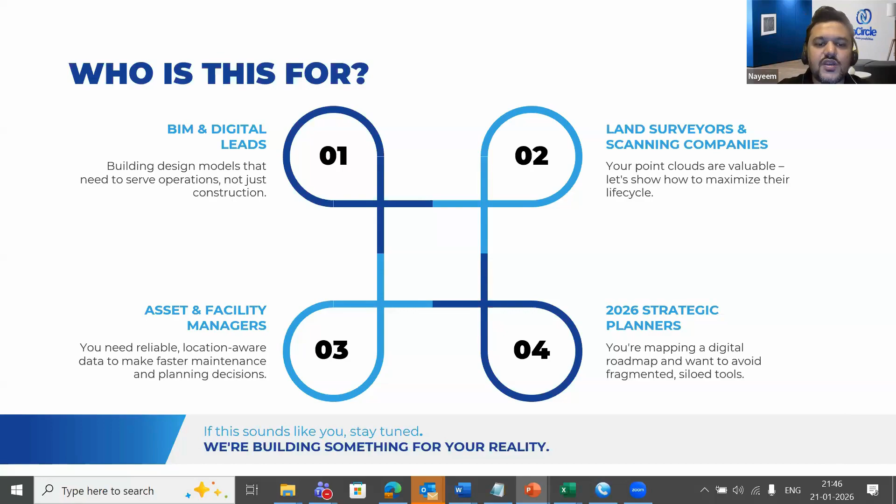And finally, if you are someone who's an asset owner, from the asset management side, you're not chasing polygons or file formats. You simply want fast, reliable answers - for instance, where is my equipment, what condition is it in, or what changed since last month. So if any of that sounds like your day-to-day world, this session is absolutely designed exactly for you.

So let's talk about 2026, because the pressure has never been higher. Clients and asset owners no longer want to hand over a box filled with different formats, like PDFs, DWGs, or even models.

What they want now is live, streaming, operational data - real-time dashboards, carbon and energy tracking, predictive maintenance insights, and very clear visibility of what's happening in the field right now.

But here is the challenge - the tools and processes we rely on today were designed for design and construction, not for day-to-day operations. So we end up with a massive expectation gap where owners are asking for actionable intelligence, and we are still delivering static documents and disconnected 3D files.

This is the pressure that is shaping every digital transformation conversation in 2026. The industry knows where it needs to go, but our workflows, formats, and platforms haven't really fully caught up yet.

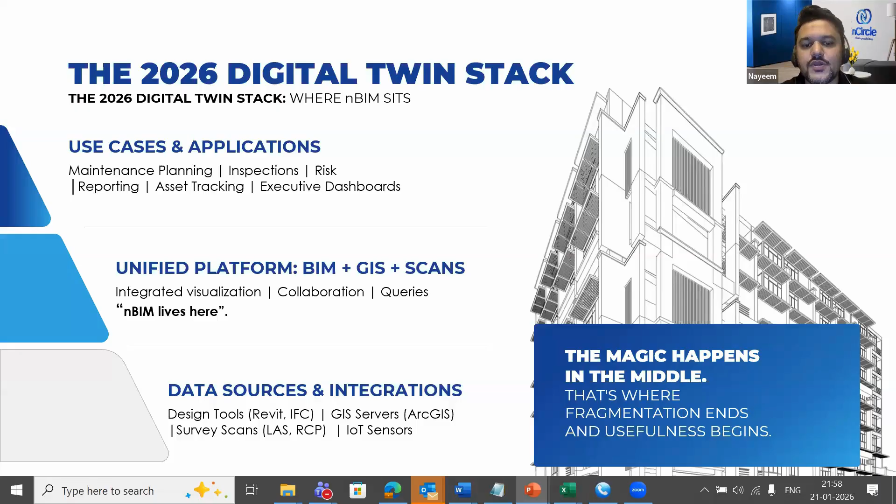So this is a stack that finally makes digital twin usable, accessible, and scalable across entire organizations.

Here's what we often come across, where every organization tries to solve this problem on their own. For example, most teams go down to two paths: either build it yourself, or buy a massive enterprise system.

Let's take an instance: you hire developers, they write custom scripts, stitch together APIs, and try to create your own digital twin platform, which is very expensive and slow. Two years later down the line, you are still wrestling with integrations, performance issues, and data alignment.

Similarly, when you buy a massive enterprise system, you're suddenly dealing with complex interfaces, rigid workflows, heavy desktop installations, and months of onboarding your team members. At the end of both paths, the result is the same.

You're still stuck somewhere in both options. The workflows don't scale up, the field teams don't adopt it, and the digital twin stays in the innovation lab instead of going mainstream.

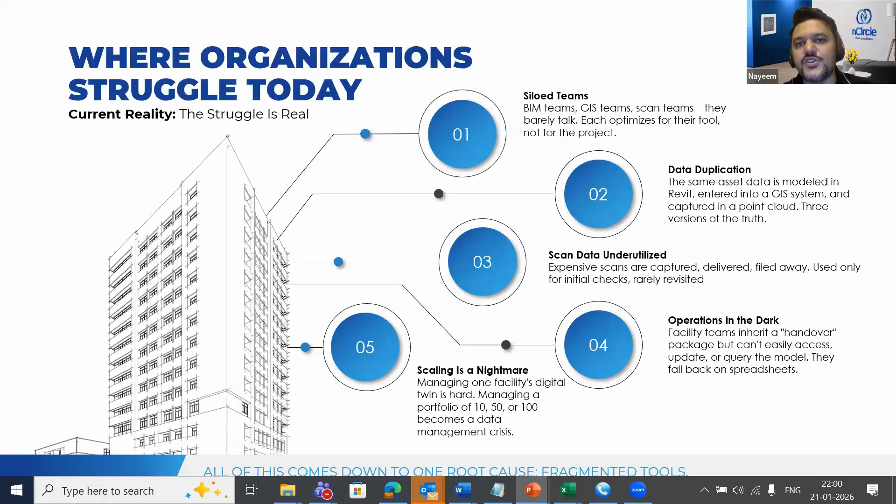But rather than keep talking about it, I would rather show you. Let's switch from slides to some real-time action, which is the demo. I would like my colleague Pratik to take over and give us a demonstration of nBIM. Thank you.

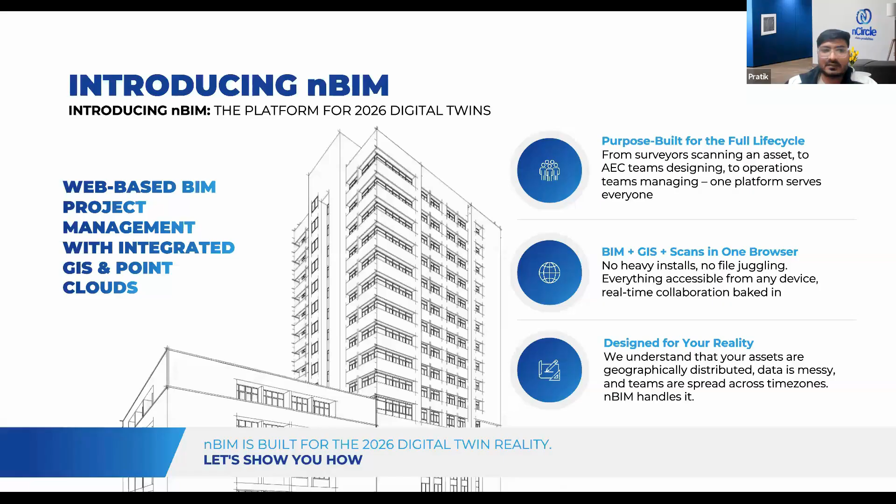So here now let me explain how this our platform solution works. So basically we have a solution that is nBIM. nBIM is basically a unified platform which is solving multiple problems.

By the mean of unified, it has multiple types of viewers. We can load BIM files, we can load GIS files. So it's basically combining the BIM model in GIS context, so we can add GIS layers. In industry, we have three types of things: BIM, which is design and details; GIS context, which is basically location and the actual; and the third part is the point cloud data, which is the actual how the model looks and how in the real world it looks like.

So what does nBIM do? nBIM will combine all these three pain points because the data is scattered, and we combine all the points in one platform, that is nBIM.

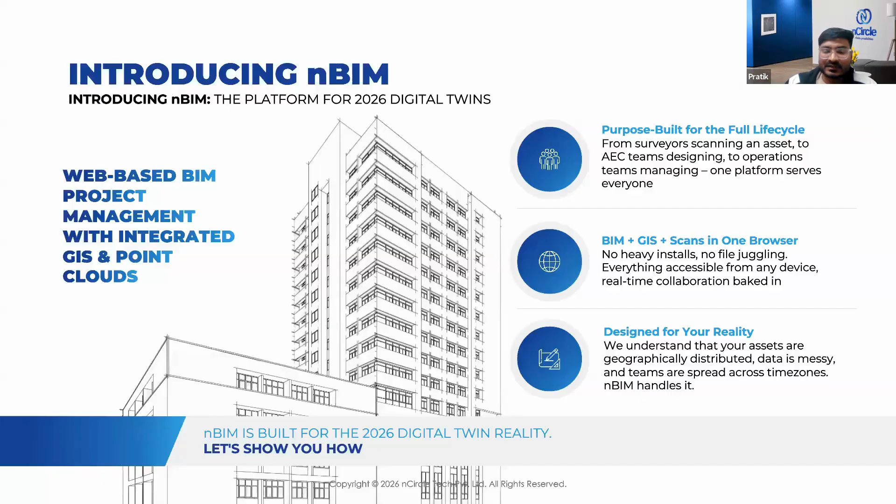Now let me move to the video part so I can explain it in a better way how this nBIM solves our problem. So let me play this video.

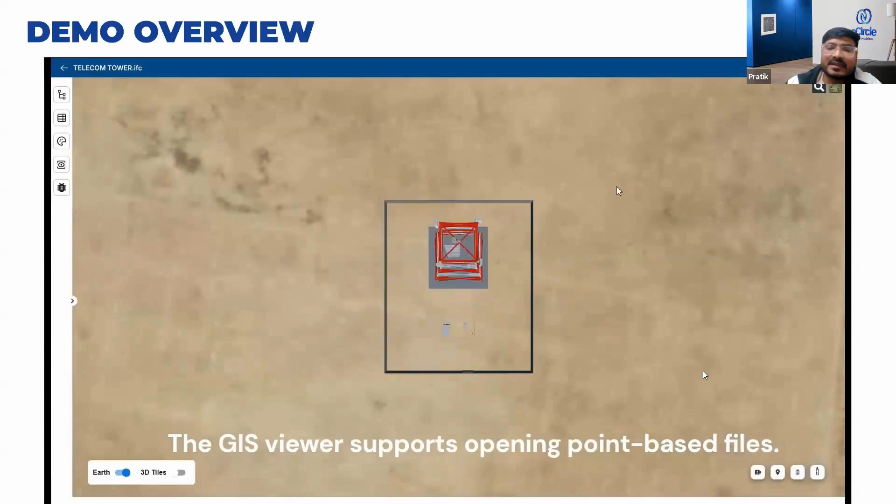So this is basically a platform where user can create projects and upload multiple files. Inside files, they can convert and open directly the files into the GIS viewer. So this is the BIM model, and we can upload this BIM model into GIS context. So we can see the actual location of the particular model and how it will look like, so that we can identify the pain points.

And if something in real world, we can have some kind of tool like a section tool, and if we have some kind of issue, we can create the issue and just assign it to another modeler or developer who can work on it.

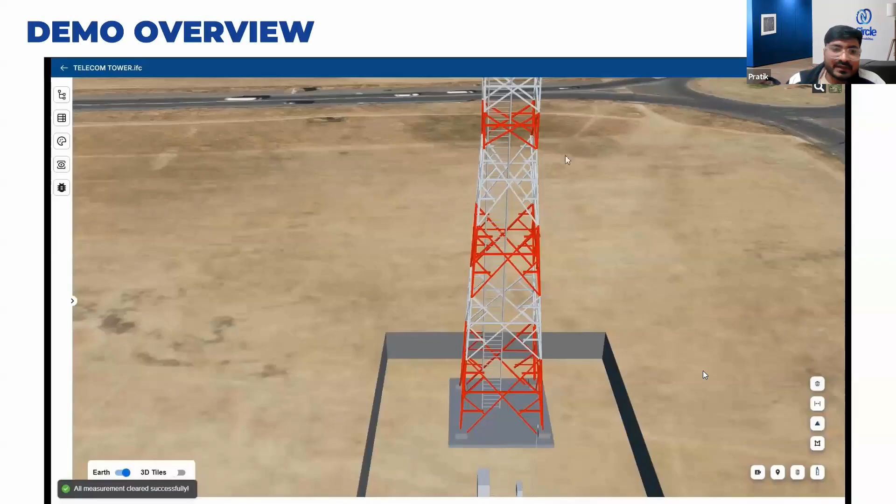So this is not just a GIS where we're putting a BIM model into GIS - no, it has many things like all the operations in terms of the viewer, like measurement, appearance, moving, rotation, orientation. As you can see in this demo, we can scale up the model, we can change the position of the model, we can rotate it. So these are the basic things which we are already giving.

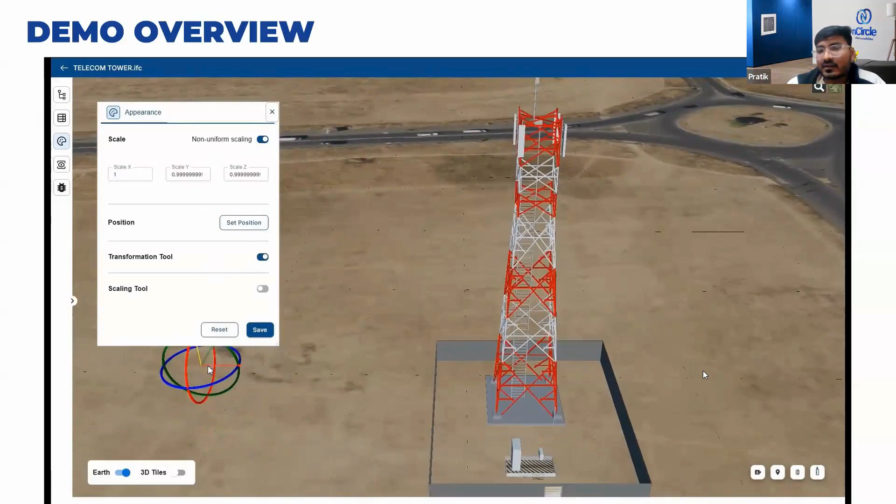But now the common part is the issue management. So if we find something, we can just create the issue and assign it to anyone. In the GIS context, you can see this scaling tool - we can scale the model and just see how it will look like in the actual world.

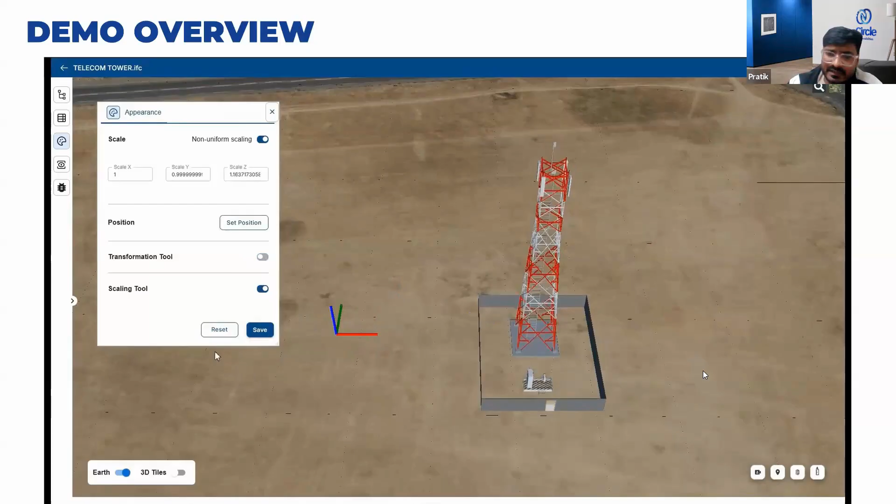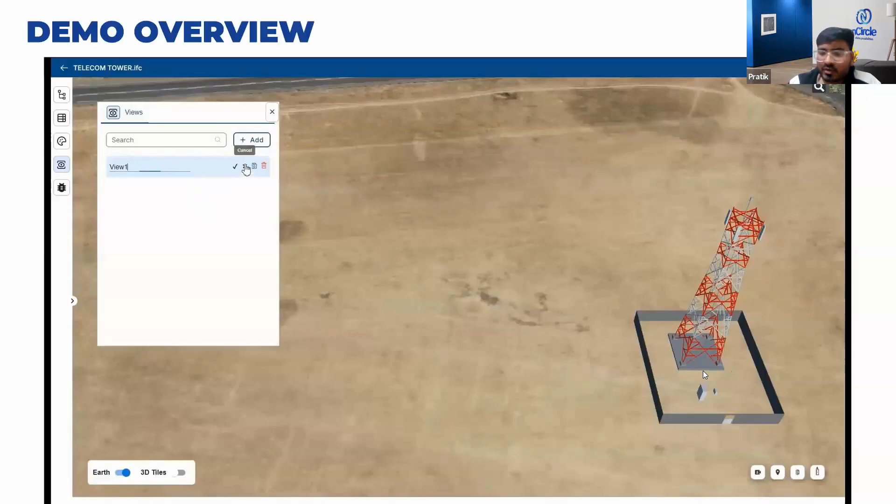Now the next part is issue management and view management. View management is another feature where we can show all the views. Suppose there is a camera angle which I want to store - we can create multiple views and store it, assign it, and send this view to anyone. We can even attach images, PDFs, or documents to any particular part of the model.

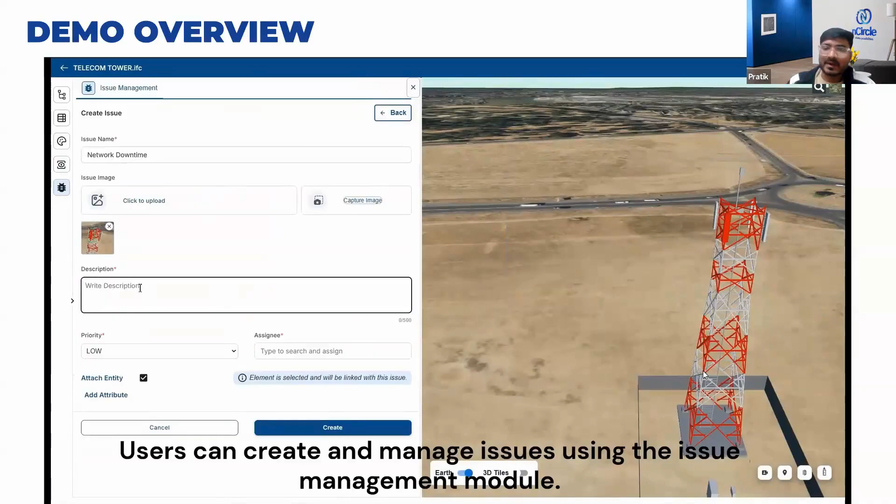Now here comes the issue management I was talking about, where we can create multiple issues. We can capture the image from inside the viewer, mark it, and do annotations like 'this part is missing, you need to work on that part and fix it.' We can assign that issue to a particular user in our project or organization, which makes our collaboration easier.

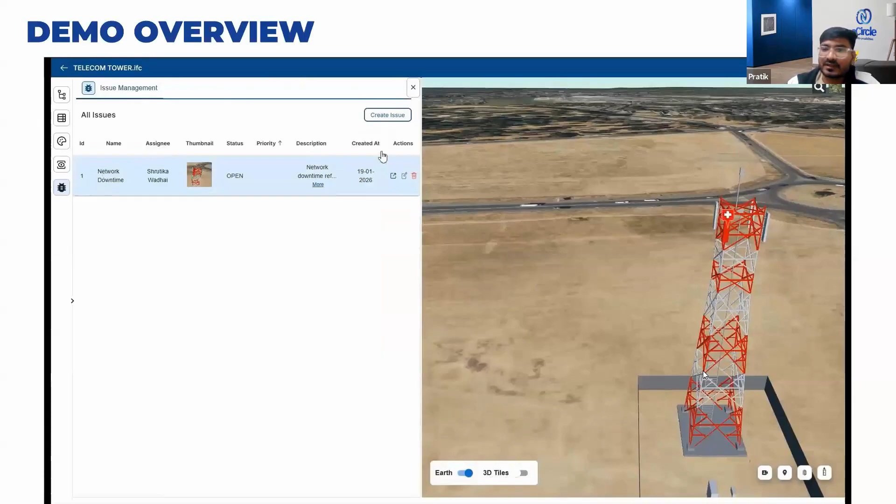So this is the one part where admin can create issues and assign to users, and they can work on it and fix it. In the later phase, we can do versioning as well - if there's an updated version, if the issue is fixed, we can see the updated version of the model, and admin can review it and finalize: okay, it is done.

And they can set a priority and status of the issue, so as you can see, we are just tracking it. This is basically a marker showing where the issues currently are - this is the tower model. I'm just showing how this tower model looks in the real world.

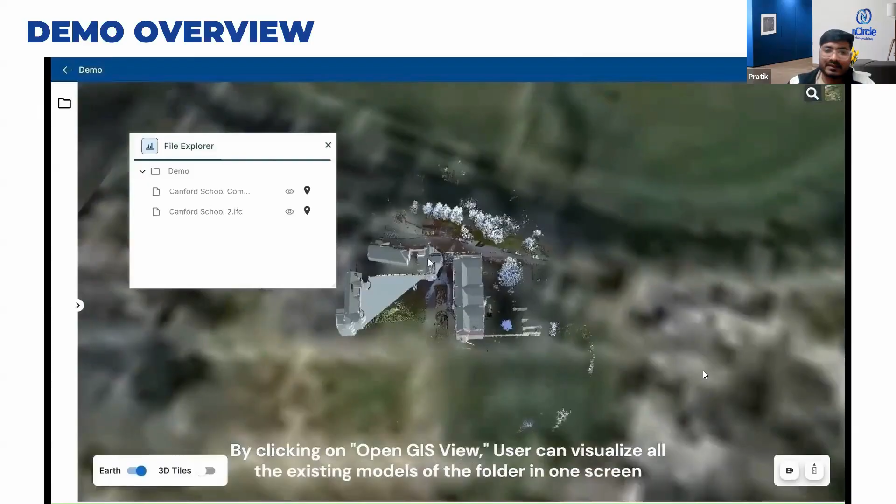Now comes to the main part of the application where we are talking about reality, that is point cloud and BIM file. You can see there's two models of the same building - this is a BIM file and this is a point cloud file.

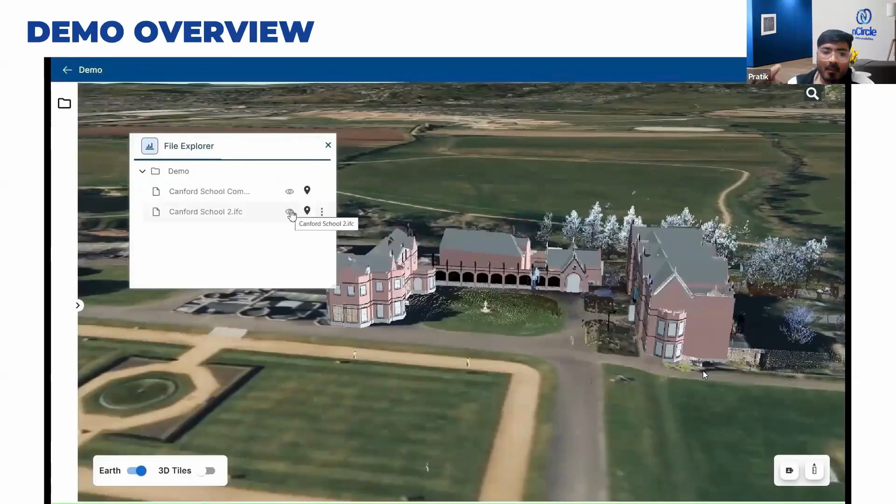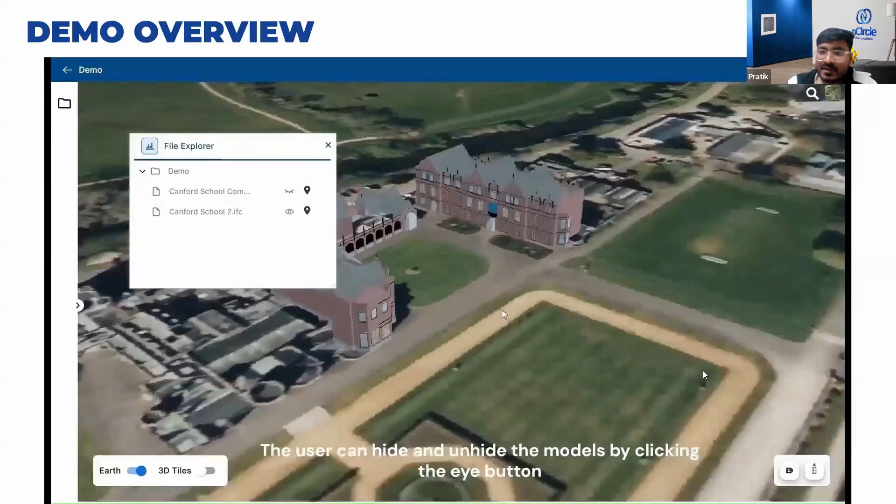So both are of the same model and now we can analyze whether all the orientation, scaling and measurement of the model are correct or not. This will help us identify the pain points, and if there's something missing or a mistake we are doing in the model, we can just fix it.

In the earlier stage of development, this gives some idea of how, because we know the point cloud is captured by the LiDAR scan, so it's the actual data. This helps the modeler create the design as accurate, matching real world scenarios. So this will help.

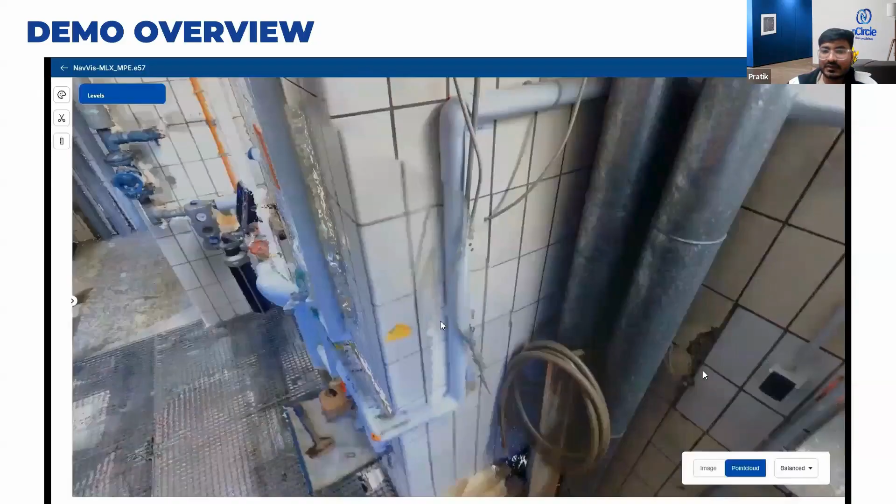Now come to the next part. We have another viewer called the point cloud viewer. In the point cloud viewer, we can visualize the 360 images. So as you can see, if the model has 360 images, we can see it, and we can also do some evaluation.

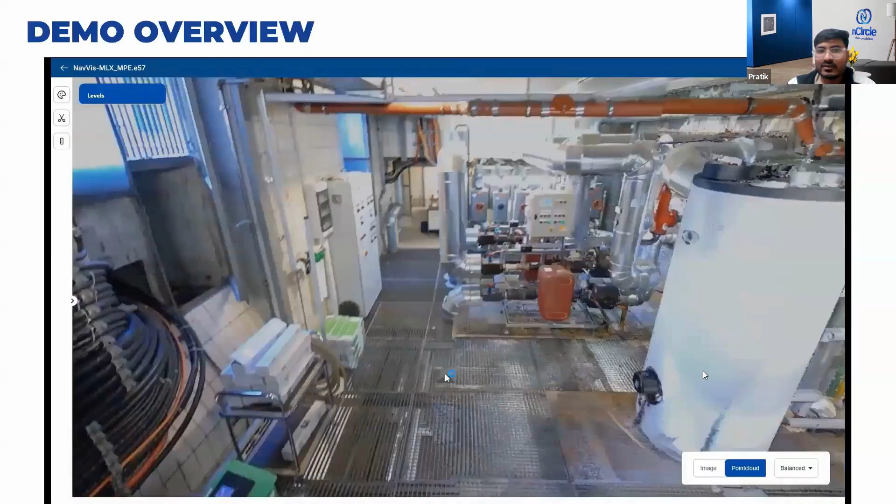Now for some part of the building, we can crop it and create a kind of mini map. In that mini map, if there are 360 images, the user can navigate and do some surveying. This is basically for survey people, where they can go and visit this 360 view, do some kind of measurement, and find how this matches our real world. This will solve our problem as well.

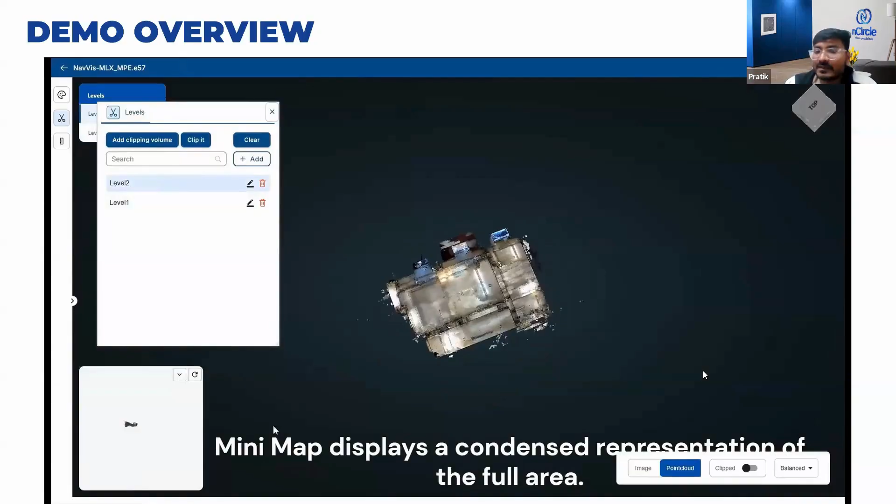So this will come in the viewer part. In the bottom left you can see this mini map, which shows the current location of the model and building. And if we navigate it, we can see multiple images are here.

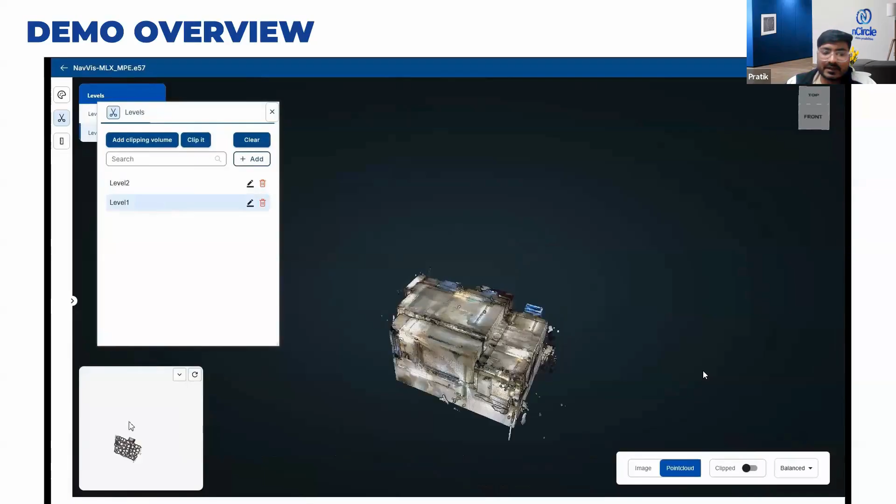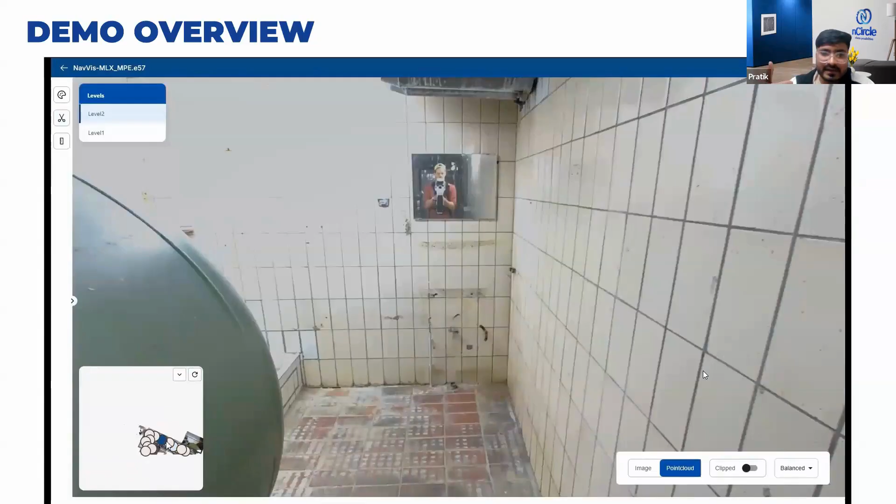Now if I click on this particular part, yeah, you can see this. If we click on the mini map at any part, we can directly navigate to a particular room. And in that room, if we find something incorrect, it can be measured and improved. We can do the kind of measurement here as well.

So we can do the scaling as well. All the basic viewer tools are available in this platform. So we can just do some measurement to check if this is accurate or not, in meters.

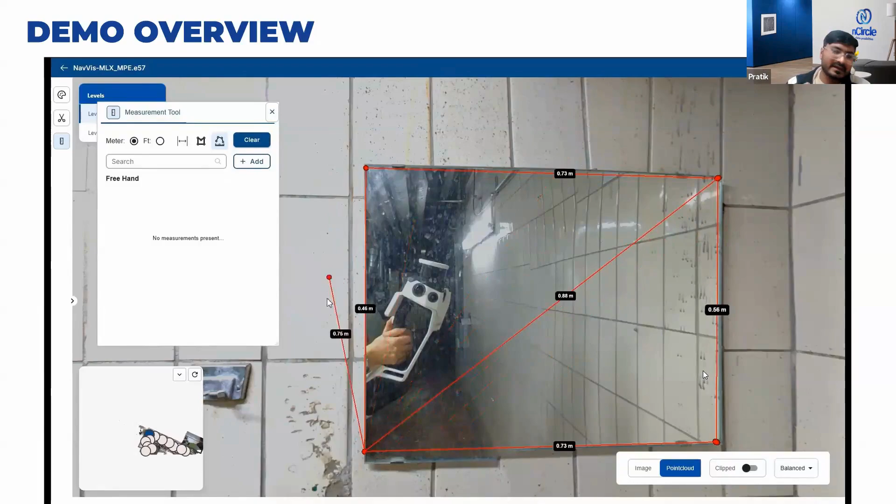This will help survey people to analyze the kind of data in the application. They can directly open the model in the 360 view, load it and compare it, and this will solve their problem.

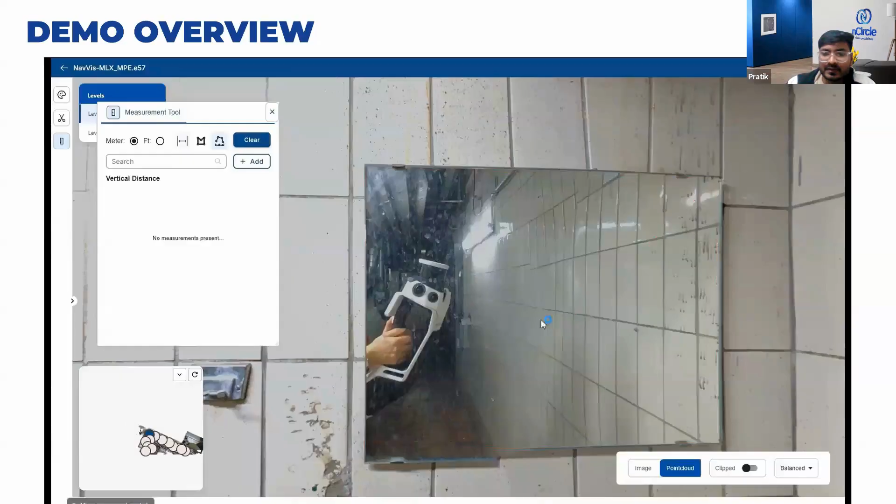Now they can add the measurement, so basically they're adding here. I'm adding the measurement right now. So yeah, let me just move it.

Okay, so after this part, there are multiple types of viewers. The third type of viewer we have is a BIM viewer. We already went through the GIS viewer and the point cloud viewer. The third viewer is the BIM viewer.

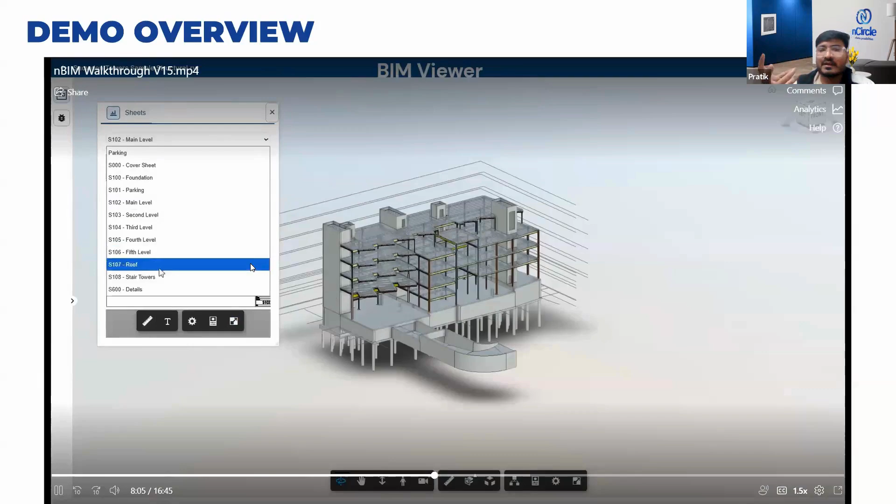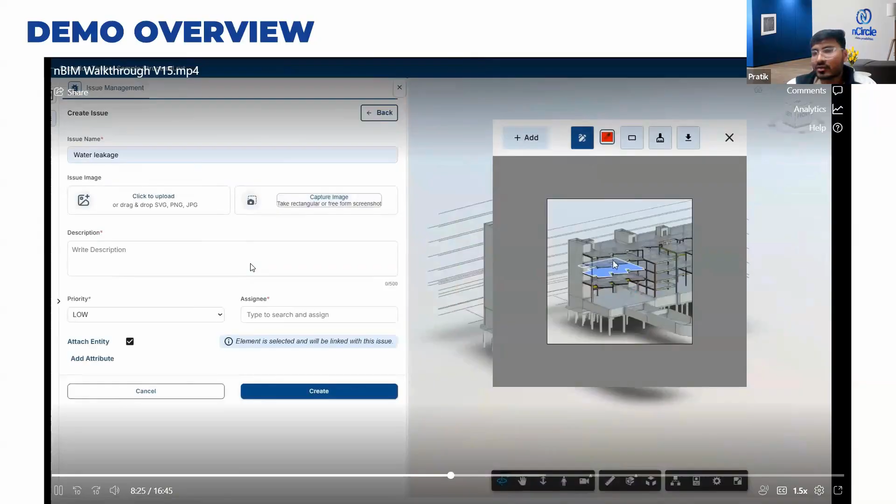In the BIM viewer, we can see the BIM model with 2D sheets, and we can see the linking between the sheet and the models both. Issue management is also present here. So if we create an issue here, we can see it in the GIS context as well. If we create the same model issue in the GIS context, we can see it in the BIM model as well.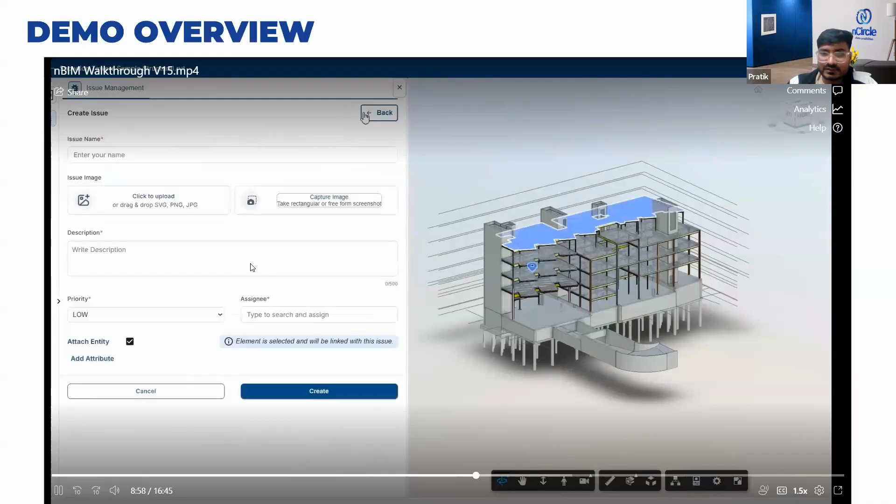So we have multiple viewers. Whatever team it is, they can open their type of viewer, navigate, do their work, and do some kind of evaluations. We have issue management here as well, where we are creating the same issue, but in terms of the BIM viewer. Now I'm just moving forward.

This is basically a folder management where the user can create multiple folders, and in each file we have versioning. Suppose there's some enhancement we did, and now we have to upload the same new version of the file or model, the user can upload it, and we can track the history of the particular model, how many versions we have, and who has uploaded the entire data in whatever common data environment we provide.

So in one file, we can add some comments, and we can track all the activities. We can share with public access or private access, with some kind of access management like viewer access or editor access.

So these are the features we have. Now suppose we have multiple versions. If I want to compare them in the viewer, we can do that as well. Once this viewer is completed, now there are two versions, so I can compare them.

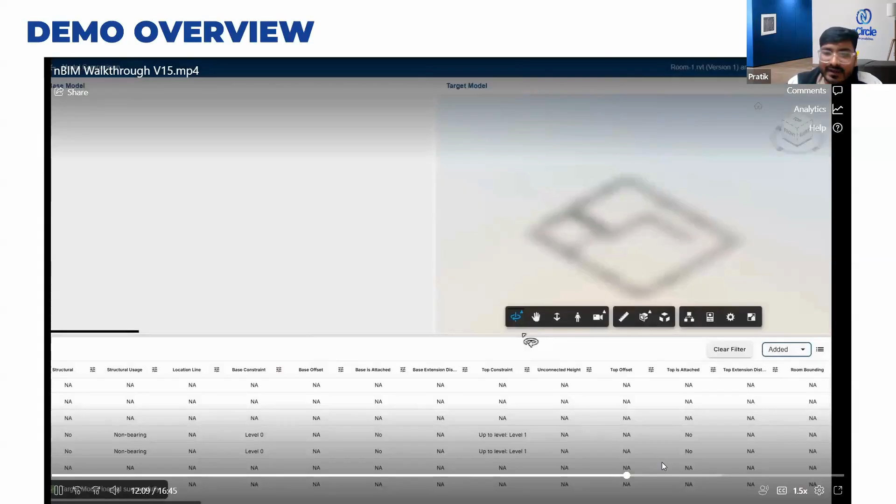With the help of the model comparison tool, it will compare both versions and give me the result of what parts were added, what parts modified, and what parts removed, so I can do a quick analysis. As you can see on screen, on the left side I can see the version 1 model, and on the right side I can see the version 2 model.

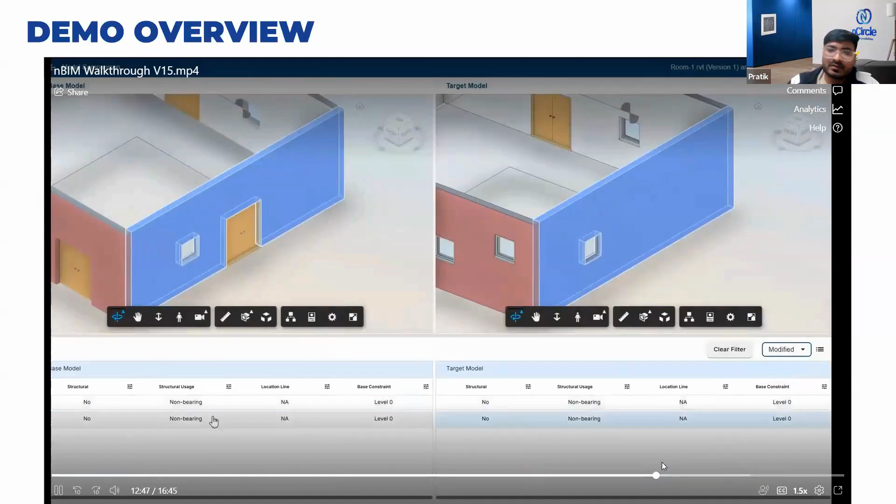In the bottom table, I can see all the newly added parts in the second version. I can do some filtration and select the columns I want. I can see the deleted parts of the first model and all the modified parts. So we can identify and visualize this comparison better.

Now I can compare in the BIM viewer as well. Basically in nBIM, we are supporting all three kinds of viewers: one is GIS, one is point cloud, and one is BIM. The main thing is the GIS viewer, where we can upload the BIM model.

So there's no need to upload it on a drive and share it with other people, who would then open the model in Revit or another tool. They can directly open the viewer instead.

We can delete the file and in this collaborative environment, we can create a copy link, a public link, so others can open the viewer and the model through the public link without needing to sign up. They just navigate to the link in the web portal and can see the model. This is very helpful for someone who wants to share the model with another person or team for evaluation.

And we can also do some folder management. We also have one more feature, which is the PDF viewer. If we have to create issues, or there's a 2D sheet of a building and I want to make some changes or address some issues and assign them to someone...